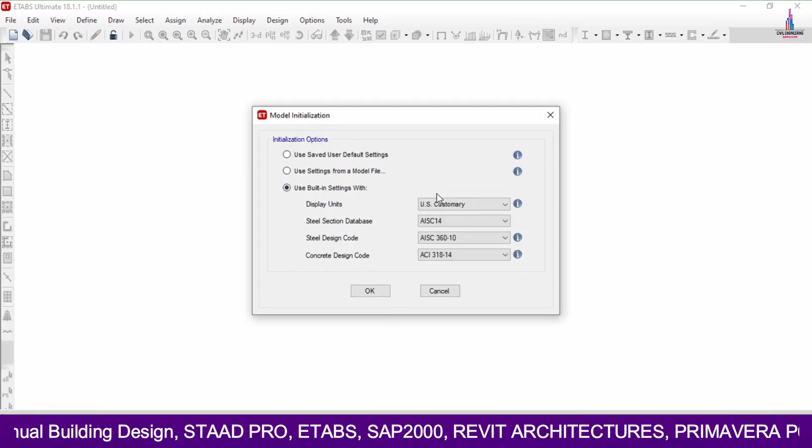Now in this case it will consist of the initialization option. We will select use built-in settings according to metric SI as per the Indian Standard Code provision, IS 800 steel design code, IS 456 concrete design code. Click on OK. Now after defining the sections related to the code books, we have to give the number of bays in the horizontal direction.

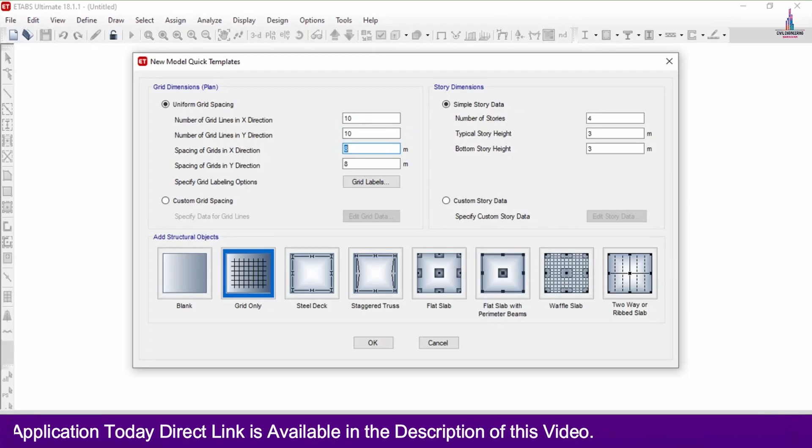Just I am considering 10 number of bays, 10 number of bays, and in the x direction approximately 4 meters I am taking. This is also approximately 4 meters I am taking. And number of stories here I am assuming as 20 stories, 3 meter is the typical story height. Bottom story height is also 3 meters I am considering here. Click on the grid only option. From these options, click on OK.

Now after selecting the grid data and story data, we have to select the material properties, which is nothing but the grade of concrete as well as the grade of steel. For this building model, I am assuming M40 grade concrete provision with HYSD bar of 500 grade.

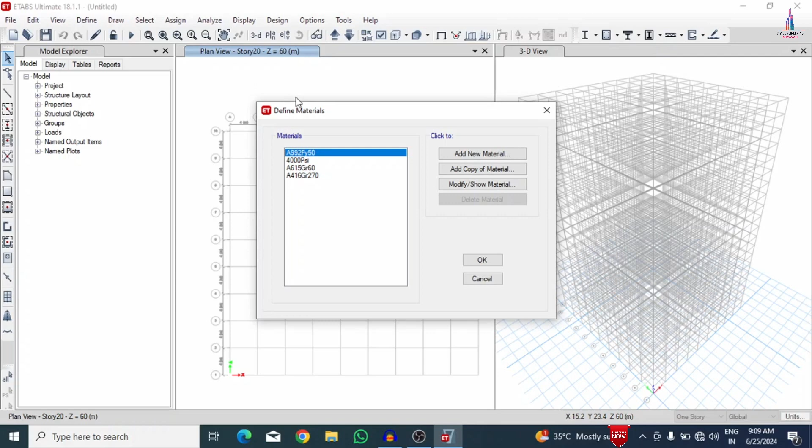Go to define option, material properties, add new material. Initially I am selecting Indian concrete as per M40 grade concrete provision. Click on OK. Again in the same process I am adding one more material related to the rebar section. I am selecting rebar which is HYSD 500 grade. Click on OK, click on OK.

Now after this we have to define the column size and beam size. Go to define section properties, select the frame sections here. Now we have to delete the multiple sections presented here. Click on delete option, again I am selecting here, click on delete option, click on OK.

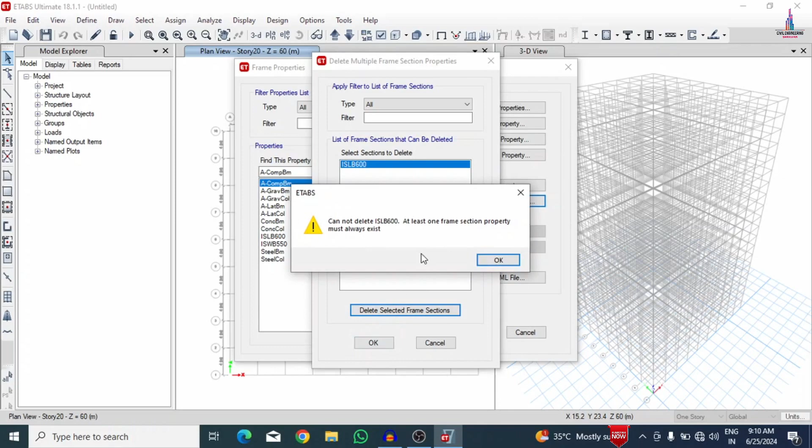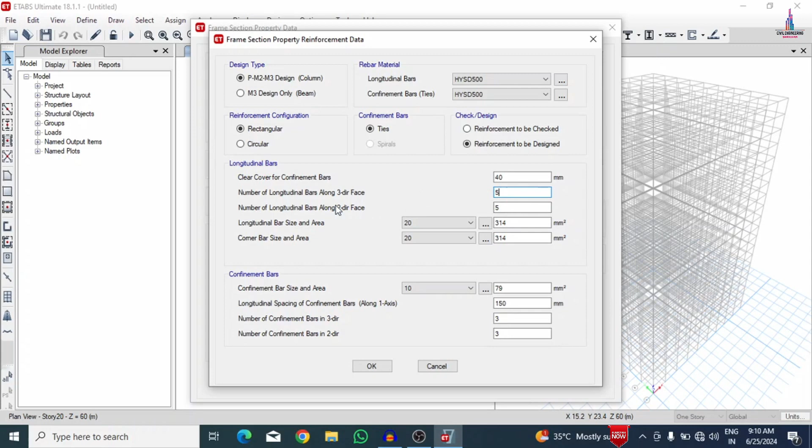After this we have to define new property, a concrete rectangular property. I am considering the column consisting of M40 grade concrete provision with 690 by 690 dimensions for this column. Again I am selecting reinforcement property, select the column, and the rebar material we consider as HYSD of 500. You can consider the number of bars based on your assumption. I am taking 5 number of bars presented in the 2 direction as well as the 3 direction. Click on apply. Now we can see this is the cross section for the column.

Click on OK. After this select the ISLB property, we will delete this property. Now I am adding one more property related to the beam section. Here I am considering the beam consisting of material M40 grade with dimensions depth 690 and width approximately 460 I am assuming here.

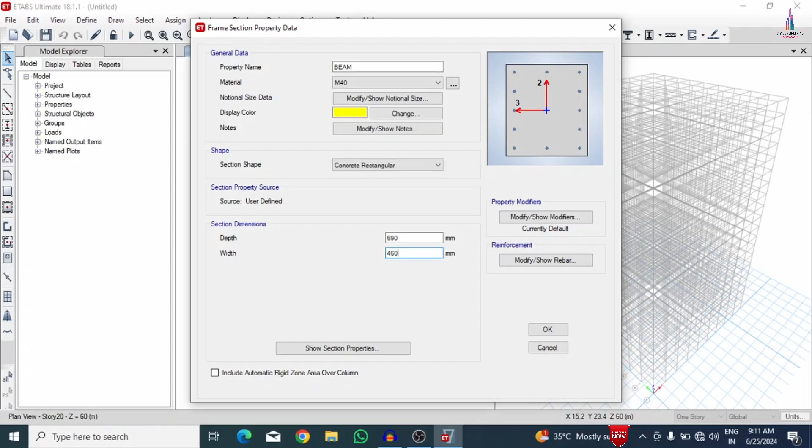Click on the reinforcement option, select the beam option from the column and HYSD of 500. We will assume the data related to the cover, selecting here 40 mm cover at the top section as well as the bottom section. Click OK. Again click OK. Now we will select the OK option.

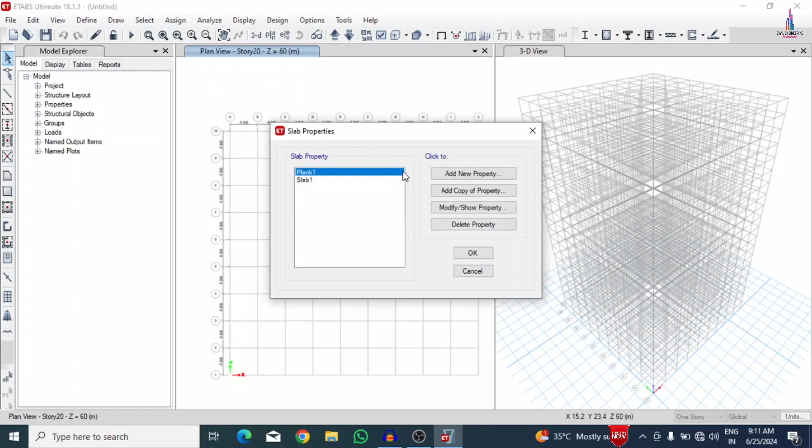After this we have to define the slab thickness. Select the slab thickness option, delete the plank one initially, and click on the modify option. I am taking 150 mm as the slab thickness for this member with M40 grade concrete as per provision standard system. 150 thickness, click on OK.

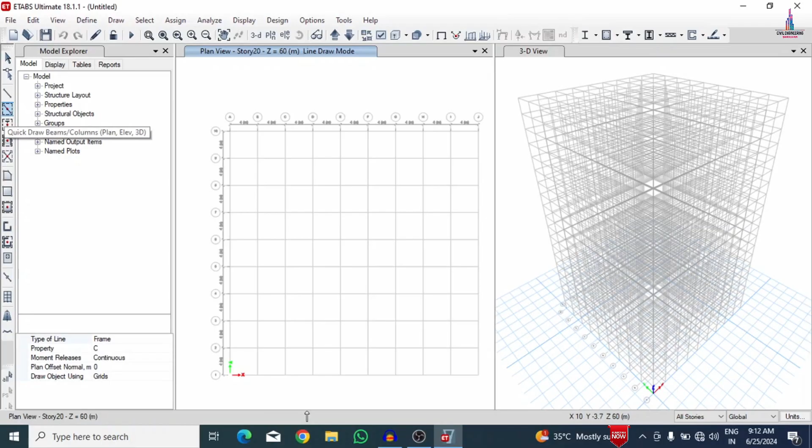Now we have to assign the properties for this building structural model. I am selecting all stories, then select the beam cursor here, the quick draw beams option, and select the property name related to beam on the left hand side. We will drag to the model here like this. In the same process for drawing the columns, we have to select the I section member, selecting it here, and drawing here like this.

Now after this we have to draw the slab sections. Go and select the slab section here, change deck 1 to slab 150 option, and we will assign it to this particular model. Now we can see it will apply the complete slab section for this model, which is related to 150 mm for this building structure.

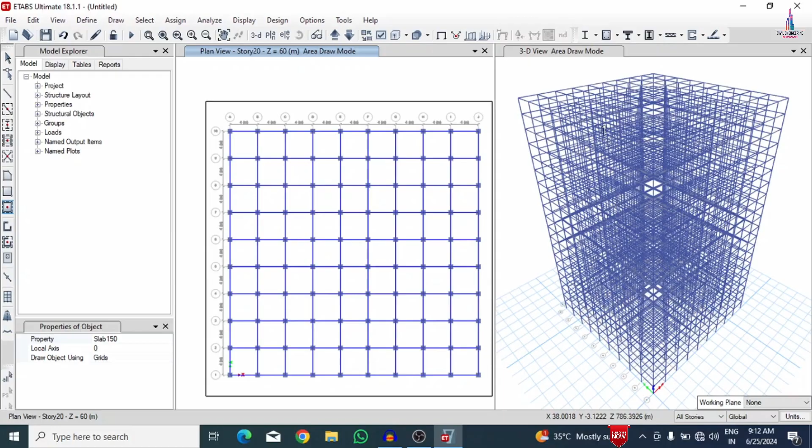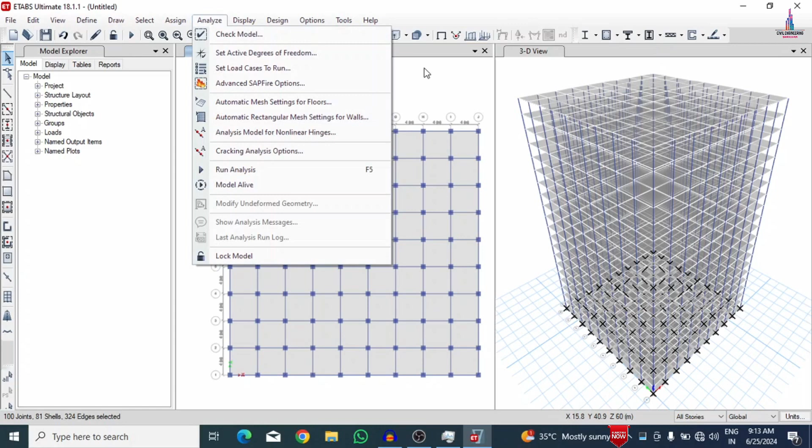After applying the slab section, we have to delete the slab section presented at the ground story level. Go to select option, select the stories option, and select the base option here. Click on delete. Most people ask how to delete the slab section at the ground story level - if you select the slab section and click delete on the keyboard, it will not delete sometimes. So for deleting the members, we have to go to the edit option and click on the delete option there, so that it will delete the properties at the ground story level for the building model.

Now after this we have to make this an irregular structural model for this building. I am considering these 3 members to make an irregular structural model for this building. Click on delete option - go to edit, click on delete, so that it will delete the members here. Now we can see it will delete the properties.

Again in the same process I will delete some more properties presented at this level for the building. Now we can see these are the members presented at the top level for this building. Go to edit option again, click on the delete option, so that it will delete some of the properties at this level for the building model.

Now after this I will make the irregularity at the center level also for this building structural model. I am selecting the unnecessary beams and columns presented for the model. Click on delete option, so that it will delete the properties at the center point of the building structure. Now we can see it will delete the properties here, making some irregularity in the building structural model by using ETABS software.

So after this we have to apply the load cases. Go to the define option, click on load patterns option. It consists of 2 types of load cases like dead load and live load. We will add the seismic loading condition according to IS 1893 codebook provision standard system in both X direction and Y direction condition systems.

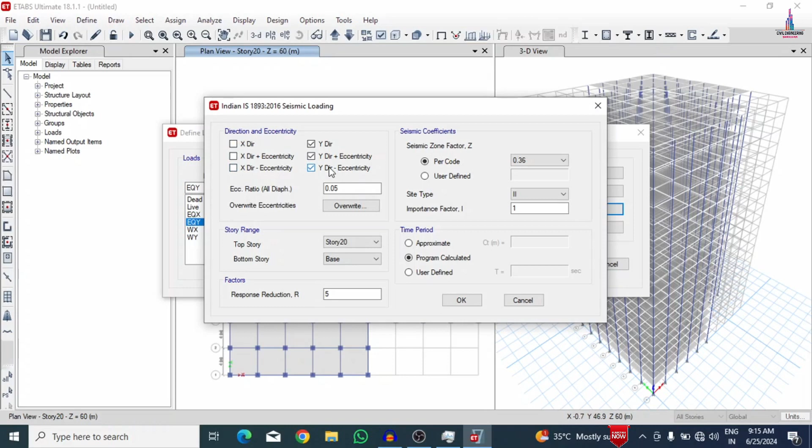Now I am selecting IS 875, click on modify option. We will select the speed according to our consideration. Just I am selecting here as per my assumption 44 wind speed, with the terrain category of 4. So importance factor 1.15 just I am taking, 0.86 is the wind coefficient CP value, and 0, 180 degrees I am assuming for this model. Click on OK option, again click on OK.

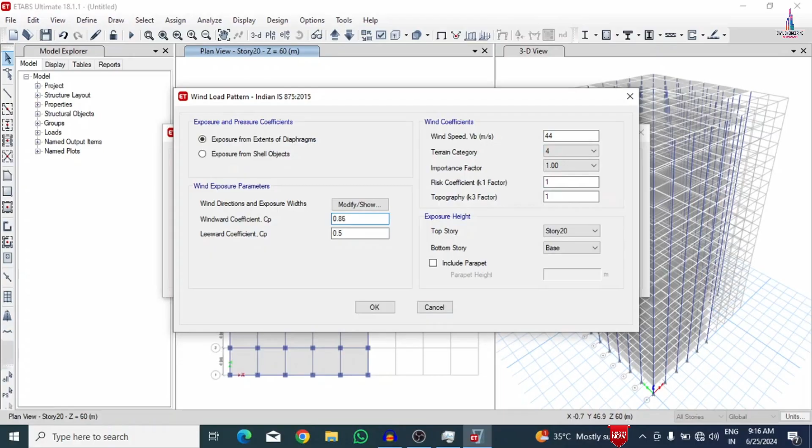Again select wind Y, modify option here. 44 just I am selecting here, and 4 is here, 0.86 and 1.15, modify here. And this is the 90 value. Again in the same process we have to enter the values 270 degrees. Click on OK option, again click on OK option.

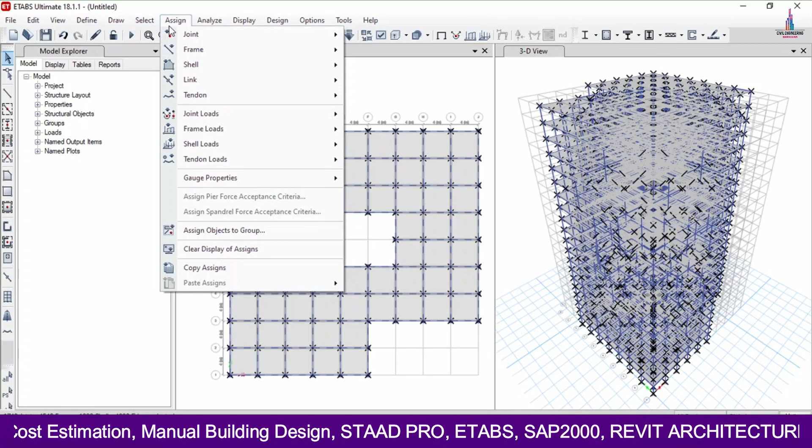Again click on OK. Now we will apply the load cases related to the live load and dead load. For further, just I am selecting all the building initially for applying the self-weight condition system. Click on assign option, loads, forces, add to existing condition. We will apply as 1 1 1 1 1 as the self-weight factor for the building. Click on apply option. So after that we have to apply the wall loading condition system.

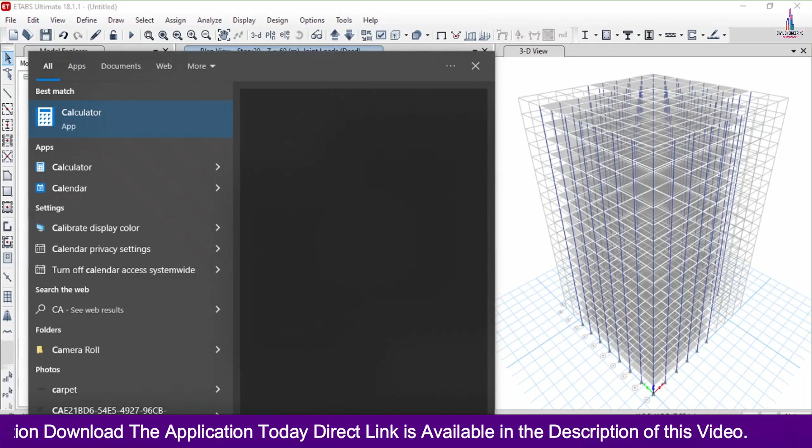Basically wall loads are of 3 types: external wall, internal wall, and parapet wall loading condition system for the building model. So we have to calculate the wall loading condition systems individually. For the external wall we will consider 0.23 as the thickness of the wall. If I multiply the unit weight of the brickwork, 20, with the height of the brickwork, I get the value 13.8 kilonewton per meter.

In the same process for the internal wall, 0.125 multiplied by approximately 3 meter height multiplied by 20 gives the value 7.5. In the same process, 0.125 multiplied by approximately 1.2 meter height, and we multiply this respective value with 20, it will get approximately 3 kilonewton per meter.

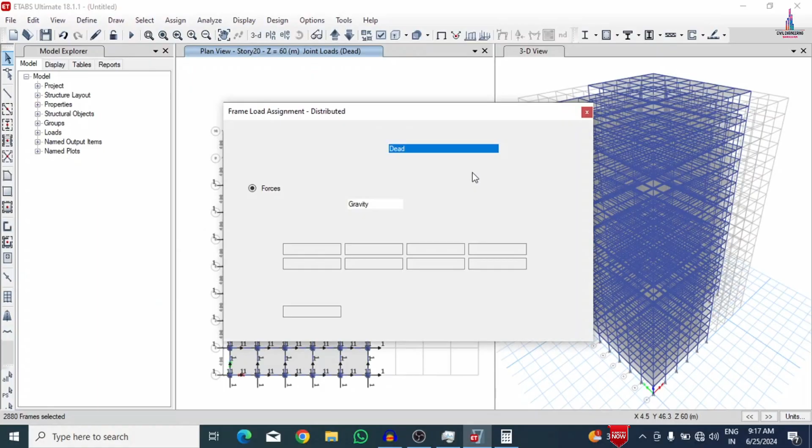So now we have to sum this value: 13.8 plus 7.5 plus 3, which comes to 24.3 kilonewton per meter is the intensity we have to apply for the beam sections. Go to select option for that, properties, frame section, select the beams option here. Go to assign option, frame, distributed, add to existing, we have to consider it as 24.3 kilonewton per meter intensity. Click on apply option so that it will apply the wall loading condition system for the members.

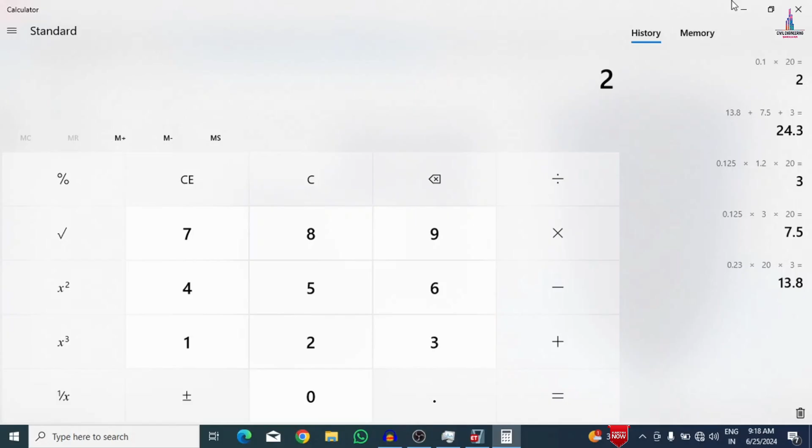After this, we have to apply the slab load condition system related to the marble sign tiles. For calculating the load related to the marble sign tiles, we consider 0.1 as the thickness of the particular floor, and 20 as the unit weight, so that it gets approximately 2 kilonewton per meter square as the intensity we apply for the slab. Go to select option, select properties, slab section, select slab 150, click on OK. Go to assign option, just I am selecting shell area load, uniform condition, apply. So here I am selecting 2 kilonewton per meter square as the intensity.

Again in the same process we have to apply the live load, just I am selecting the dead load to live load with intensity of 3.5 kilonewton per meter square. Click on apply so that it will apply the live load condition system for this model.

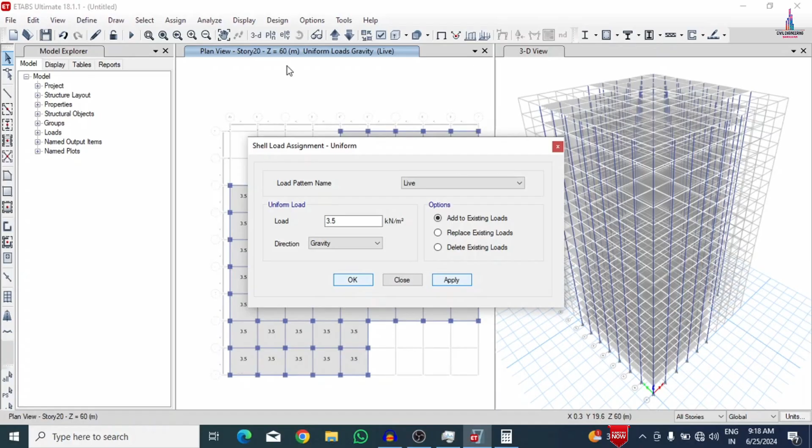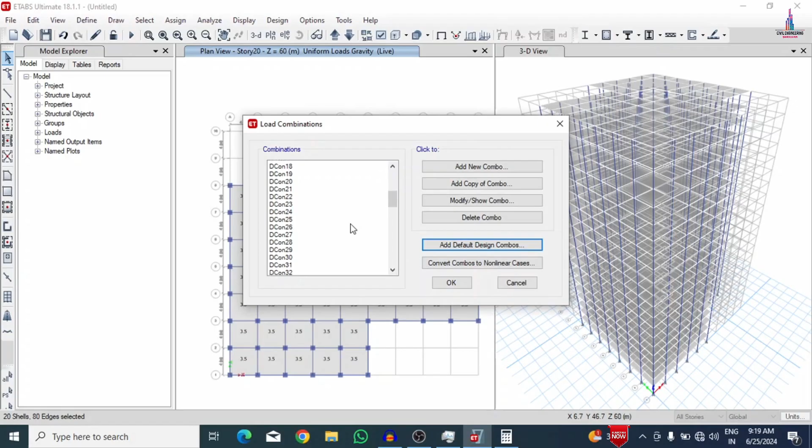So after applying all the load cases, we have to apply the load combination for this building. Go to define option for that, select load combination, click on add default design combination according to concrete frame design, click on OK. So if you want, you can add the slab designing section combination also. So here I am adding one more combination system, default design combination according to concrete slab section, click on OK, so that it will add the load combinations here like this. After that, click on OK option here, so that it will apply the load combination for the building structural model.

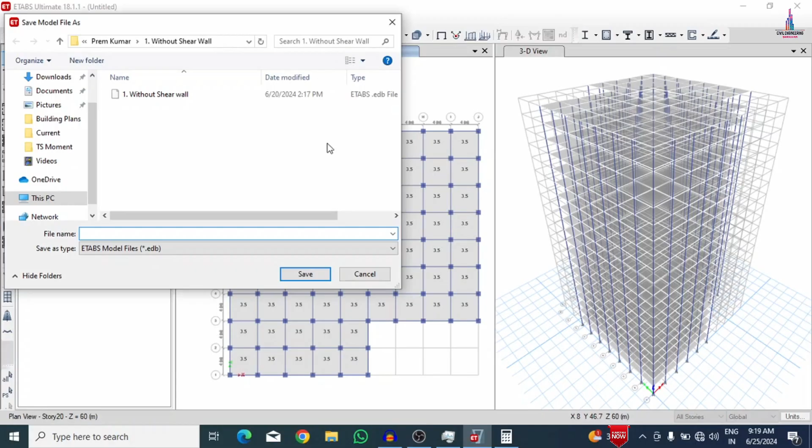Now after this, we will do the analysis process. Go to analyze option, check models initially. We will check for the joint checks for this building so that it will check for the joint check. If any errors are obtained, then it will show you the complete details. Again, we will do the analysis process. Go to analyze, set load cases to run option, click on run now option so that it will ask you to save the model here. Just I am selecting my desktop, just I will create one new folder.

Here I am selecting high rise building. Click on save option so that it will do the analysis process for this building under the considerations of both the gravity loading condition system as well as the lateral loading condition system. After that we will see the results related to deflection, shear, bending, torsion, etc. which is presented for this building model.

Now we can see here, this is the deflection diagram for this building model. So we will check the shear force diagram also for this building model.

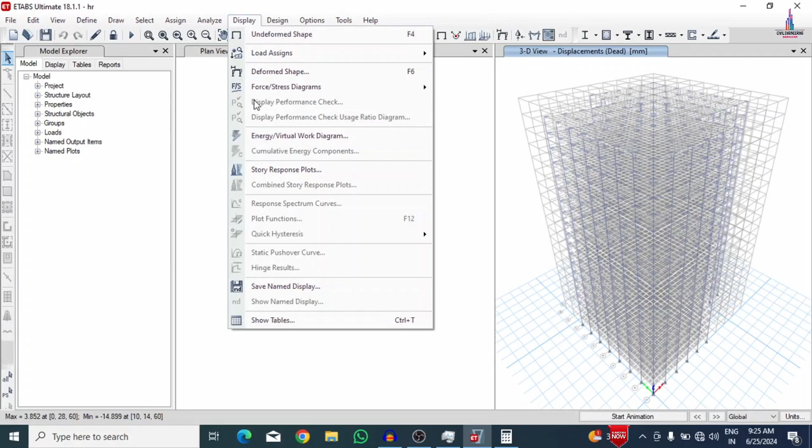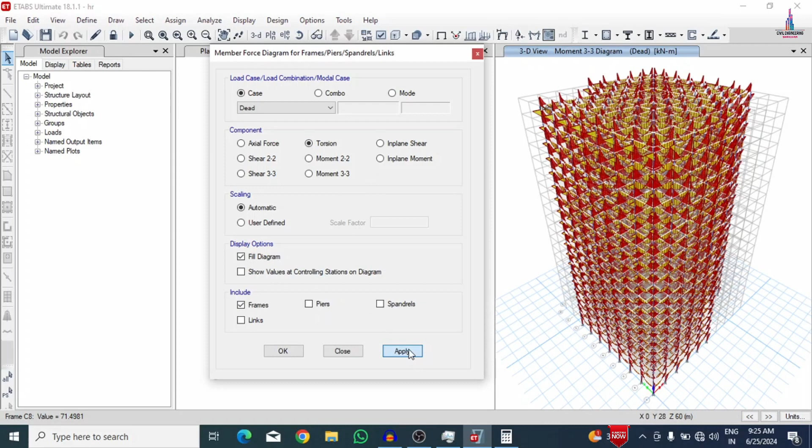The bending moment diagram you can apply here so that it will display the complete bending moment diagram for this building model under the application. Now the torsion diagram - if you click on this, then it will show you the complete torsion diagram for this building model under the load application.

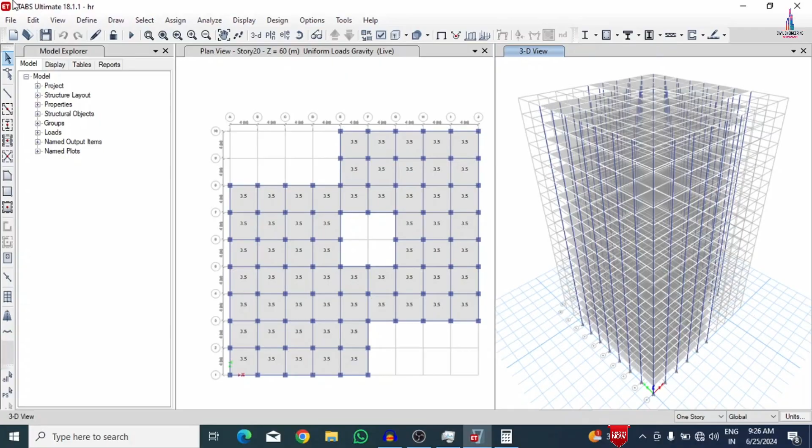Go to edit option for that. After unlocking the model, go to edit option, select the edit grid strip condition system, select add strip, select story number 20, click on X direction A, click on apply so that it will apply the complete strip condition system at the top story level in X direction. Again in the same process we will apply the strip condition system in Y direction with B, click on apply so that it will apply the strip condition system in Y direction.

In the same process, we will select the story number which comes under the 15th story, under the X direction strip condition A layer, click on apply so that it will apply the strip condition system at the 15th story X A layer. Again in the same process we will apply the strip condition system at the Y direction B layer, click on apply so that it will apply the strip condition system at the B level.

Again after this we will select the story number related to the 10th story. Click on X direction condition with layer A, click on apply so that it will apply the strip condition system presented at the 10th story for this building. Again in the same process I am selecting the Y direction condition with the strip layer B, click on apply option so that it will apply the complete strip condition system at the B section.

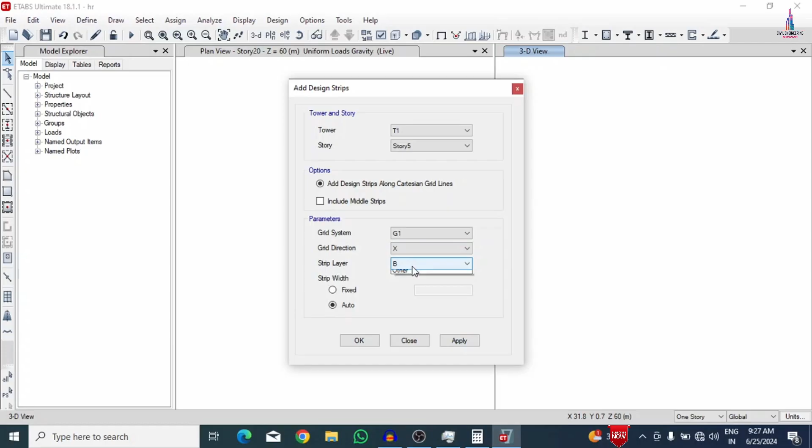If you want you can take the 5th story also, so here I am selecting the 5th story also for this model. X direction with A, click on apply. Again in the same process I am selecting the Y direction condition system, grid direction related to Y direction condition system with the B layer, click on apply option so that it will apply the strip condition system at the 5th story level also.

Click on OK option. After this we will do the analysis process once again with the considerations of the strip condition system. So for that, click on the run analysis option for this building model.

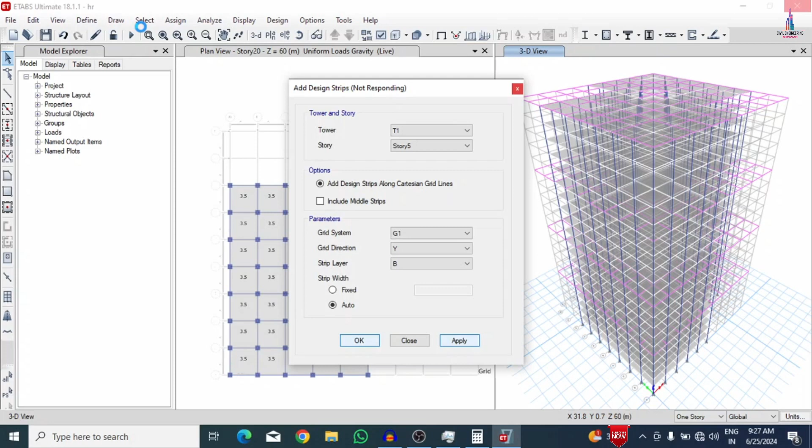Now we can see it is showing the complete analysis process here. Now we will design the structure.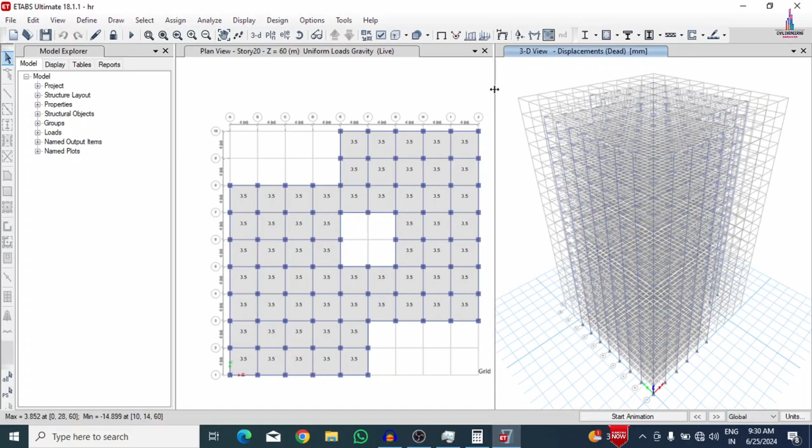Go to design, concrete frame design, click on start design check. Before that we will select the IS code book - select the preferences here, select IS 456-2000 code, click on OK. Now after this, click on design option, concrete frame design.

Click on start designing check option so that it will start designing the members related to beams and columns for this building.

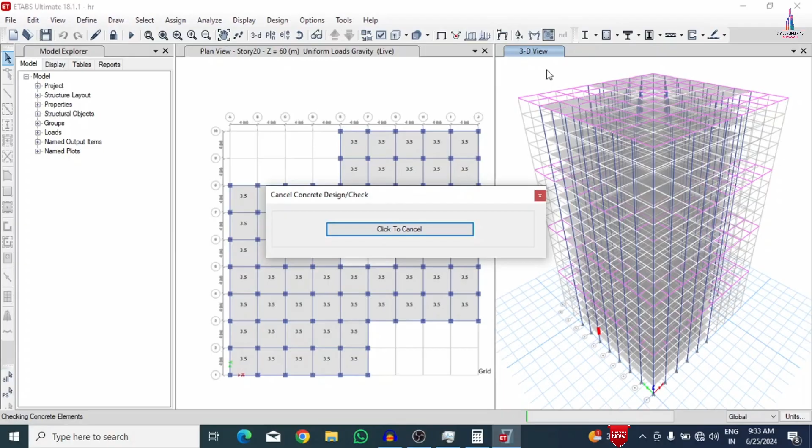Now we can see here it was done with complete designing of the members. So after that we have to design the slab section.

Go to design option, concrete slab design section, we have to select here. View/Revise Preferences, select IS 456-2000, click on OK. Now in the same process we will go to design, concrete slab design.

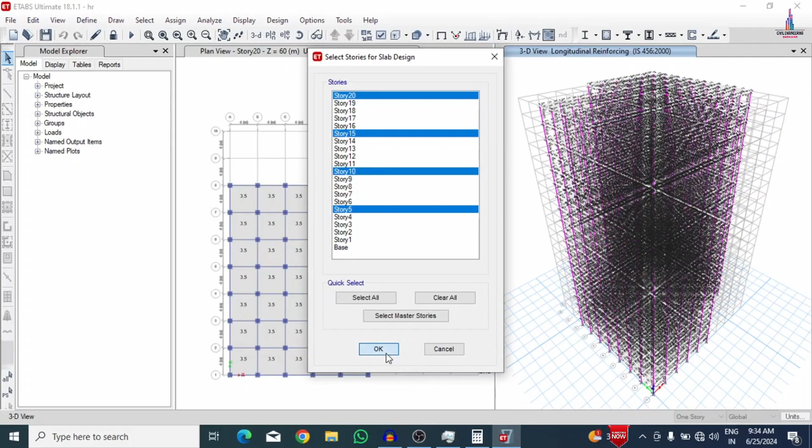Here we have to select the story number of the design: 20th story, 15th story, 10th story, 5th story we have to select. Click on OK option so that it will design the slab section related to 20, 15, 10 and 5 for the building structural model.

After that we have to click on design, concrete design. Click on start design check option so that it will start the designing of the member as per IS 456-2000 code provision standard system.

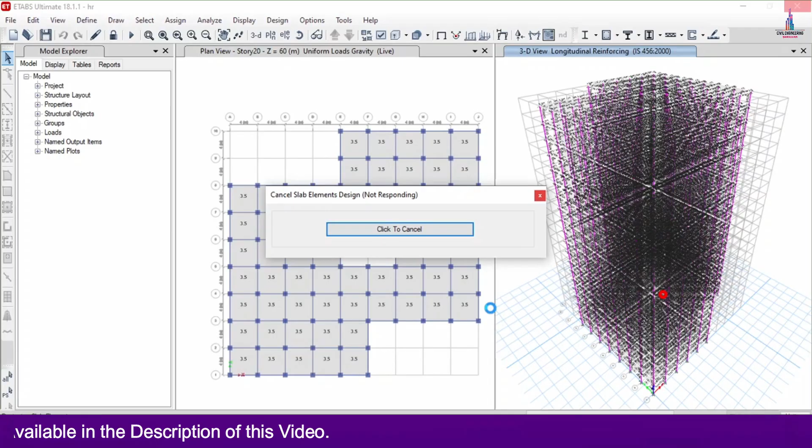Now we can see here it was done with complete slab designing section. It is showing the strip pressure diagram. Now we will save this file.

Click on save option. Now we will close the ETABS software before. Click on close option.

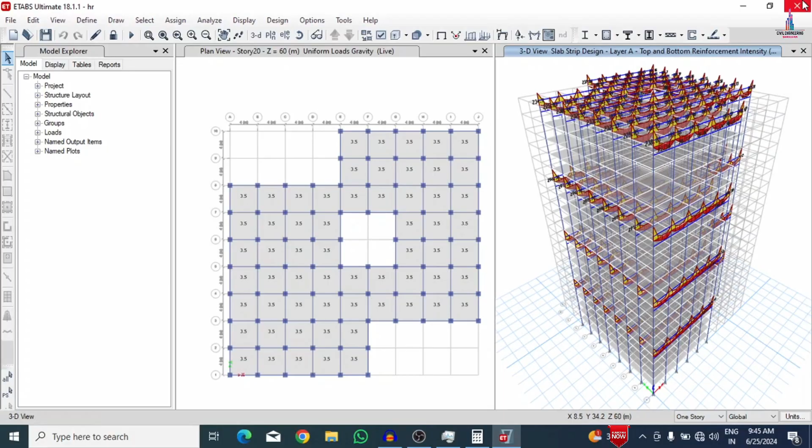Now we will do the detailing in CSiDetail version software. Just I am selecting CSiDetail software here. Click on file option, new detailing option.

Open EDB file. Firstly we will select the design desktop HR file. Initially the model will open in ETABS software, then after that it will be directly imported to CSiDetail version software.

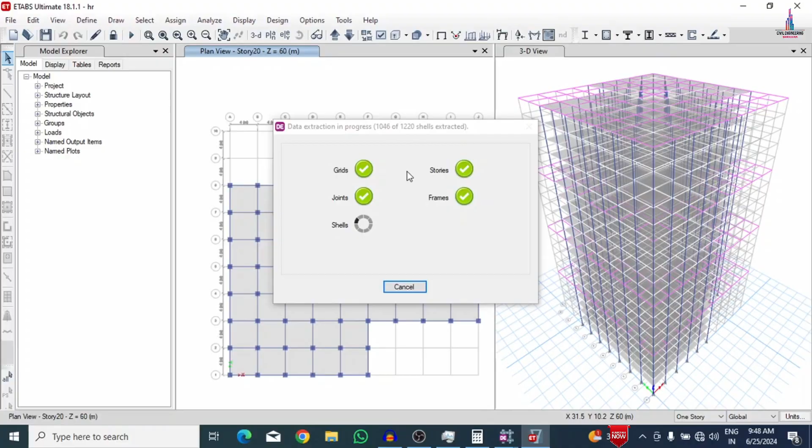Was done with complete importing process. It is showing pier and spandrel results is not available. Click on OK option. So after that,

we have to select the detailing units, select metric units, and as per SI system you can consider SI system. Just I am taking length in millimeter, section thickness in millimeter, force will be in kilonewton and rebar weight will be in kilogram.

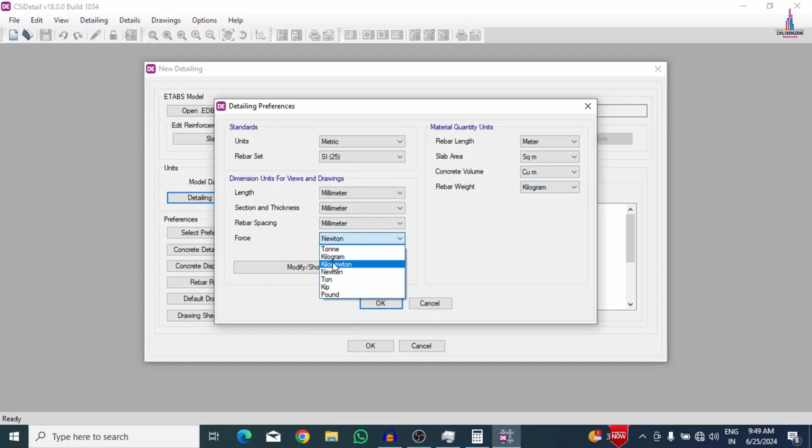Click on OK. Select the preferences according to IS code provision standard system we will select. Click on concrete display preferences option, or else directly click on rebar rules option.

So you can consider the beam option and you can consider the minimum spacing, maximum spacing based on your assumption. This time I am taking 150. This is 150 and again this is also 150. Just I am taking here, 150.

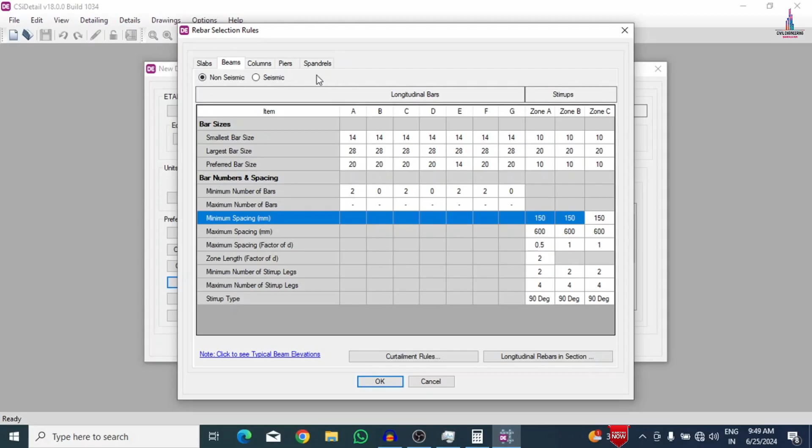So 600 I am keeping constant, same as before. So this is also 150, just I am considering here, and I click on slab section also. So you can consider 120, just I am taking.

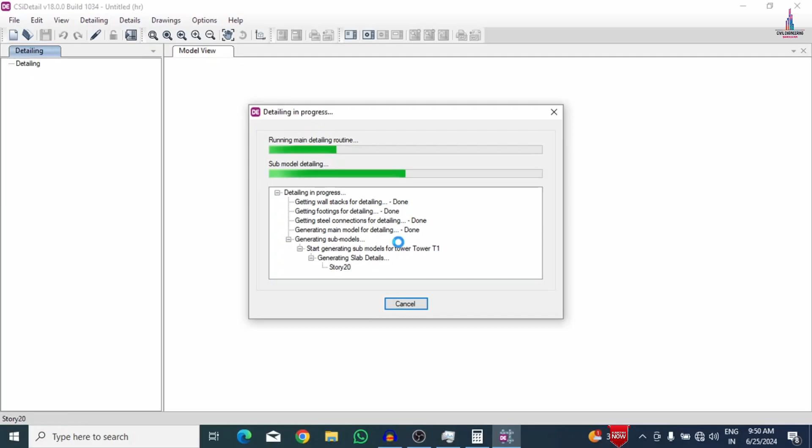Click on OK option. Directly click on the OK option so that it will do the designing process for this building structural model under consideration. After done with the detailing process, I will show you the complete designing results related to slab section, beam sections, column sections for this high-rise irregular building structure.

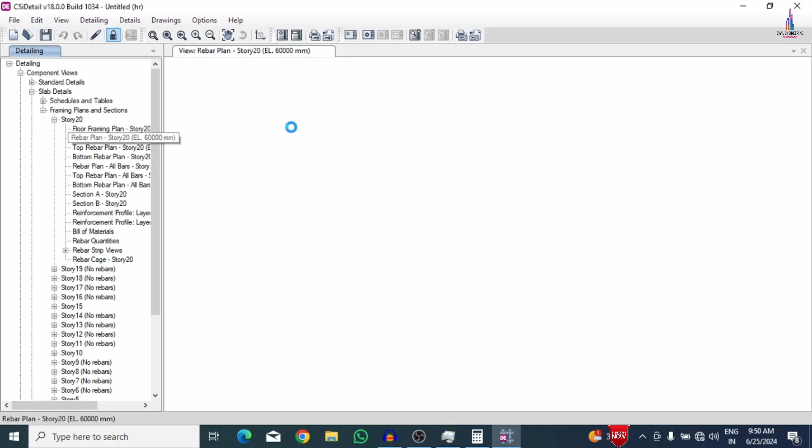Now here you can see it was done with complete designing. So this is the floor framing plan. This is the rebar plan which is available for this particular building structural model, presented at the 20th story.

Just I am selecting directly rebar cage option. You can see the material quantity and top rebar plan, bottom rebar plan based on your assumption. Just I am directly selecting rebar cage diagram for this particular building structural model.

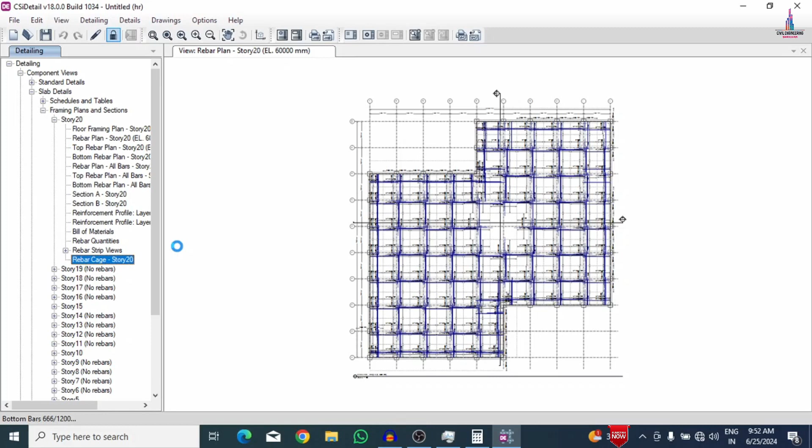Here you can see this is the reinforcement diagram. Again in the same process, select the beam detailing. Just I am directly selecting elevation view, any one of the floor.

From this, just I am selecting rebar cage for that particular beam. It will show you the complete reinforcement design results which comes under that particular beam section for the model.

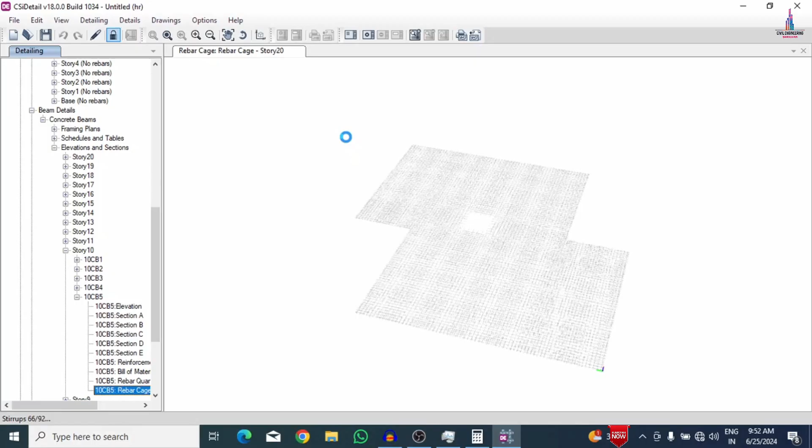In the same process, I am selecting the column designing section. Select the column, elevation, select any one of the column, rebar cage option, so that it will display the complete rebar cage diagram related to the column design as per IS 456-2000 code provision standard system design results.

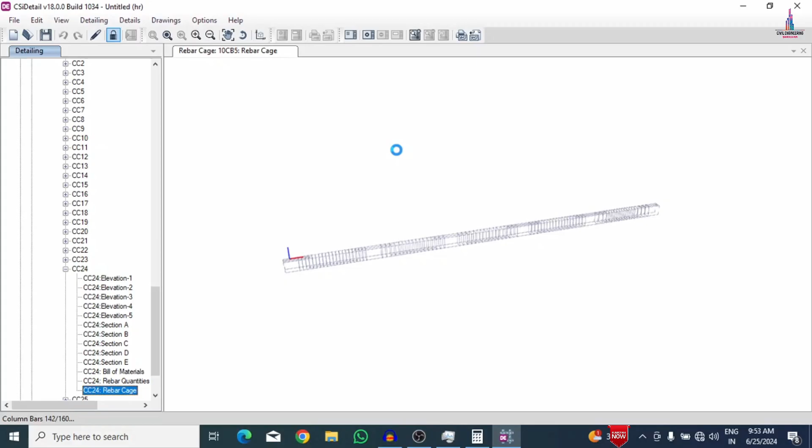So now we can see this is the column design results related to the 20-story building structural model by using ETABS software. So this is the complete process of analysis and designing of high-rise irregular building design by using ETABS software.